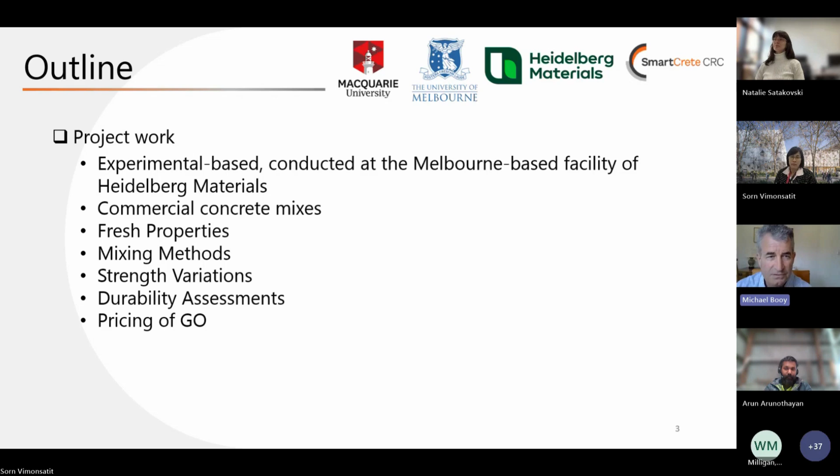So this was an idea of the concrete that we used for the trial program. So a mixture of 25, 40 and 60 MPa concrete. We tried it with ordinary Portland cement and slag, as well as ordinary Portland cement and fly ash. And we tried graphene oxide additive levels from 0.03 to 0.05%. So very, very low additions of graphene oxide. It doesn't take much. We used 2 different graphene oxide product suppliers. And you can go to the next slide, please, Sorn.

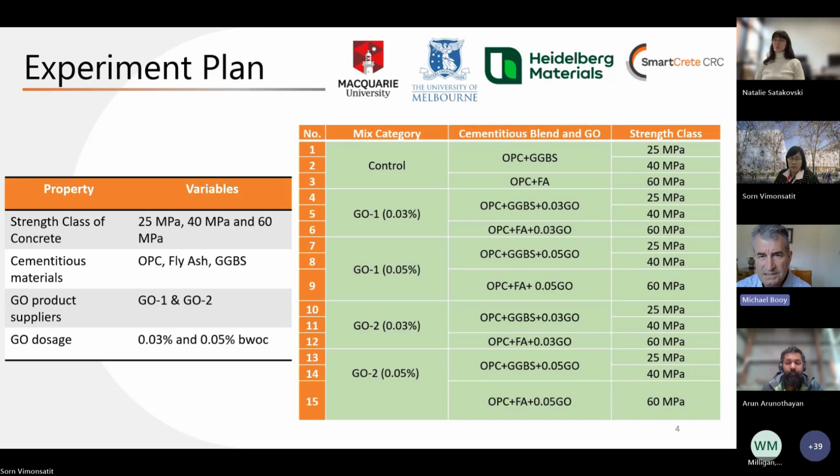There's some pictures of the trial room down in Melbourne. There were some issues with slump retention that the university team were trying to get a handle on, and we managed to sort that out pretty quickly. We just had to avoid adding the concrete admixtures or pre-mixing concrete admixtures with the graphene oxide, because I think the graphene oxide was grabbing hold of it and not making it available for the concrete, for the cement.

So when we changed the mixing sequence of the concrete additives, the graphene oxide additive, and water, we solved the slump retention issue, or the slump issues, and we were able to demonstrate that the graphene oxide certainly had no negative impact on slump retention. If anything, it might have actually improved slump retention a little bit. So as long as we got the sequencing right of the graphene oxide into the concrete trial mixes, we didn't have any issues with achieving the target slump or slump retention.

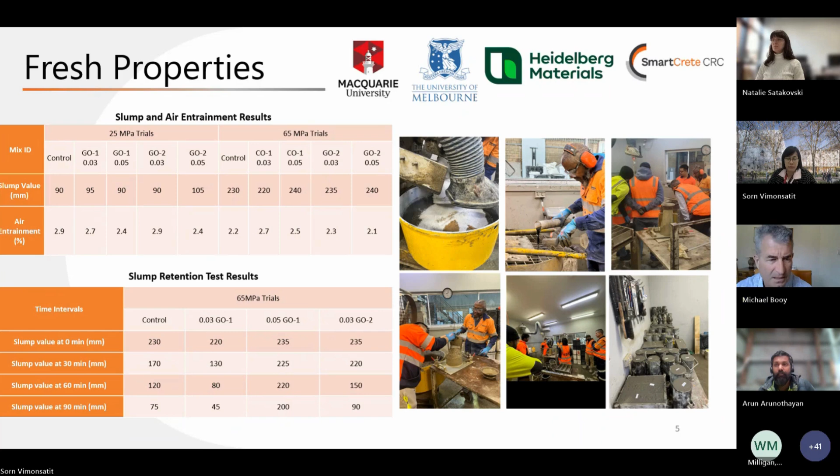Next slide, Sorn. So what we did find, though, is when we got the workability and the additive timing right, we lost some of the expected strength improvements. They became unreliable, and Thazitha did some work on PCE doses. So we were using the concrete admixtures to dissolve the graphene oxide, and you can see that there were very mixed results depending on the amount of the concrete admixture that was used to disperse the graphene oxide. I think what we were seeing when we got workability right is inconsistent results in 28-day strength improvement, and we believe it was down to insufficient dispersion of the graphene oxide.

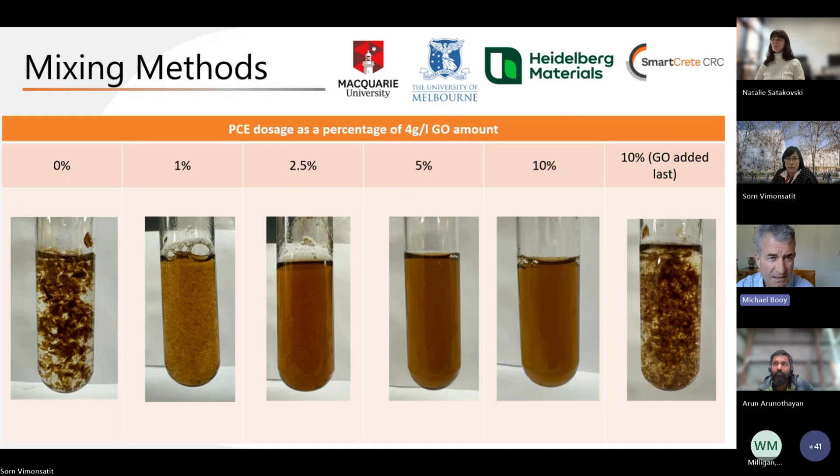So I think the aim of the game, in terms of getting consistent strength improvement results, is all about getting the dispersion right. So it really becomes a game about finding what sort of chemistry is going to do the job. And I must say, we didn't really get to that point during this one-year project. We got some results between 5 and 25% strength improvement, but we weren't able to achieve that consistently. So I think there's a huge potential here, but we really need to take it a little bit further and figure out what dispersion agents will get the consistent results.

So this is just a slide on the different mixing methods. It basically demonstrates the different methods that were tried, and mixing process 5, where you allow some of the concrete admixture, high range water reducer, to be taken by the cement and some of it to be taken by the graphene oxide. But again, a lot of it will come down to what dispersion agent is used.

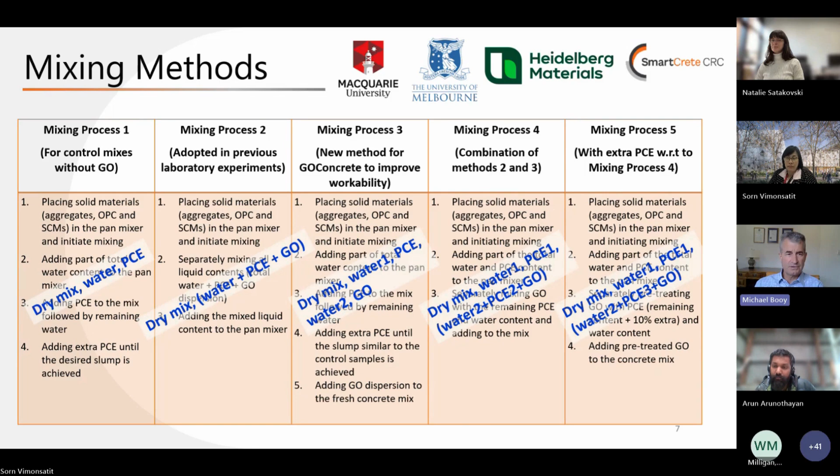So the remaining part, as Michael has already mentioned, the mixes we've done, there were 3 mixes, the main commercial mixes with 3 different strength grades. The two key properties are the slump retention and the compressive strength. So we checked that. Michael, correct me if I'm wrong, the compressive strength test was done at your facility. Yeah, correct. Some of the durability tests were done at University of Melbourne.

Okay, so first I'd like to present this. The control is the blue one, the one without the graphene. And then we have the slump. As Michael already said, we were happy with the sequencing mixing method that managed to retain the slump, which we were not able to achieve before. And then we tested at 4 days, 7 days, and 28 days.

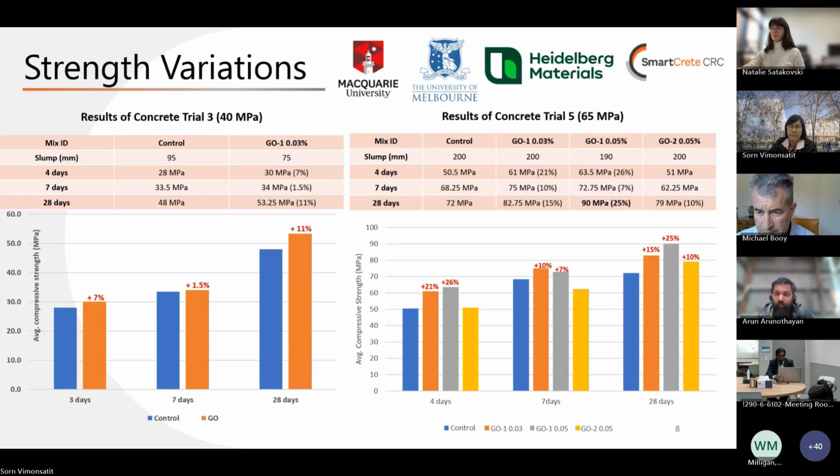Along with the mechanical properties, we've also done some durability properties, mainly at the University of Melbourne. The first one is the rapid chloride permeability test, according to ASTM C1202. Basically it's checking the Coulomb charge passing, according to this table. The control already has a low permeability passing. And for the concrete mixed with graphene, we find that it's very similar, on the lower side as well. So these results are very promising that having graphene in the concrete can improve, even though slightly, the chloride permeability properties.

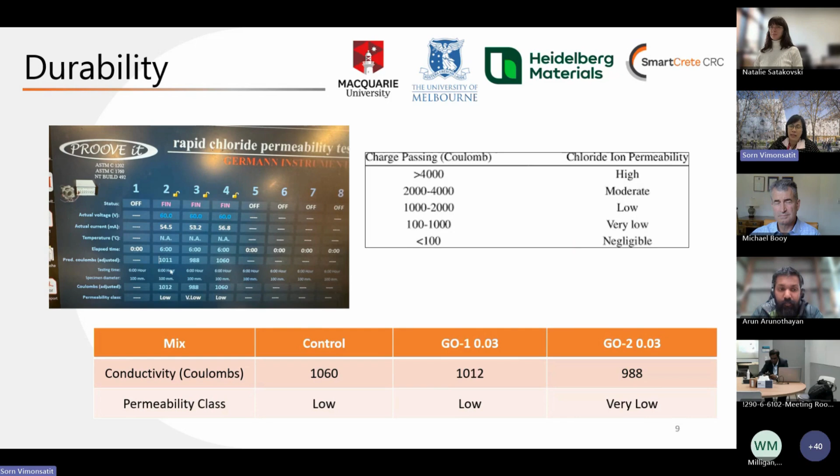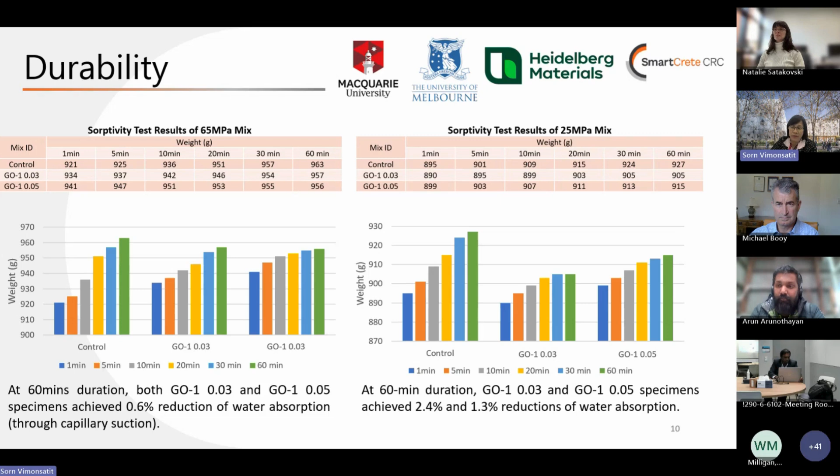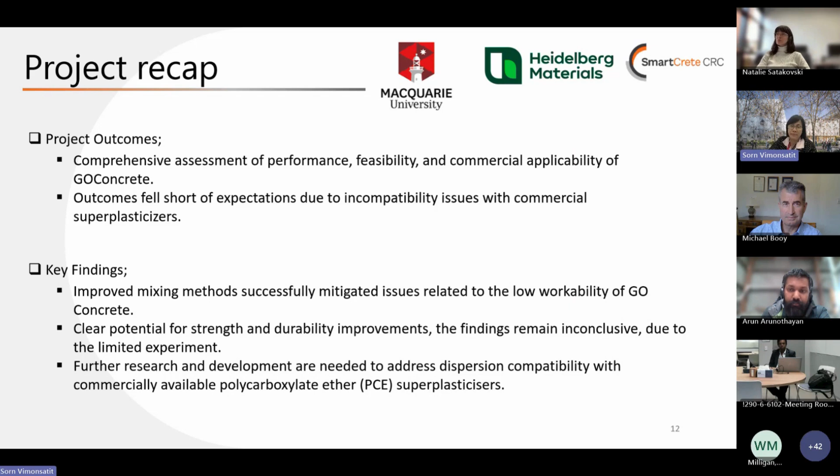Okay, sorry. And the last one: a lot of work still needs to be done on development using different types of superplasticizers, and to address compatibility in terms of the dispersion of this material to make it commercially viable for industry. So I think that's it from me.

Thank you very much. I'd also like to say something, if you don't mind. Michael already introduced how this project started with support from the SmartCrete CRC, in collaboration especially led by Heidelberg Materials. The reason I was part of this project is the first discussion we had was at Concrete 2023 conference in Perth. Michael was talking to Professor Priyan Mendis about the potential of using graphene in concrete, and I happened to be in the middle of that discussion. So, why not develop this project and submit a proposal to SmartCrete CRC. That's how it happened.

So what I'm trying to say is that a conference like this CIA concrete conference is very good to attend. The upcoming one is in September, in a couple of weeks' time. If anybody is interested, that's where we should go, and something like this could happen, a new collaboration. Thank you very much. A shout out to all the academics out there: if you are in for the next grant project, come to Concrete 2025. It's happening, and SmartCrete's heavily involved with Concrete Institute of Australia.